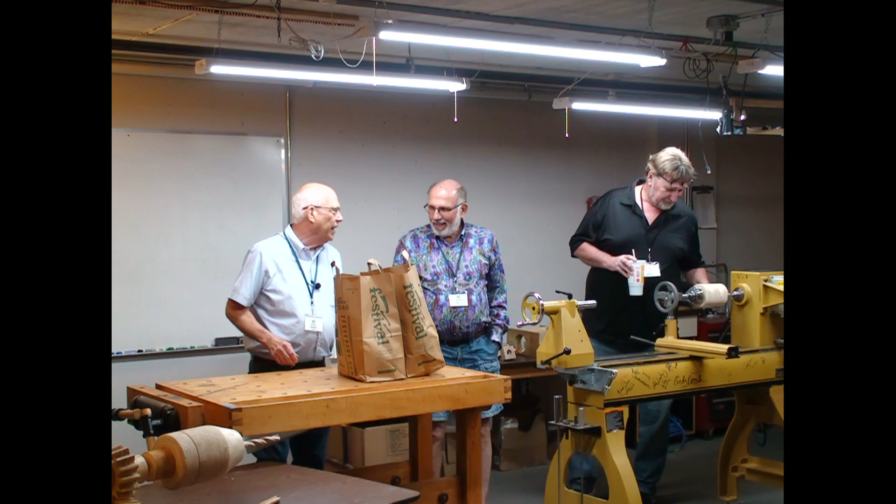There were 5 of us that got together to build this monstrosity over here. Couple months ago. Can't hear ya. Hold on. Hold on. Let's use this one, and then I'll get the other one going. Can you hear me now?

Yeah? Okay. There were 5 of us that got together to build this monstrosity set up here. And the other 2 that aren't here are Joe Ebley and Jay Pillay. They all contributed different pieces. They all gave them back to me, and I put it together. And I had very, very little tweaking to do to make it go together. All right, so everybody did a very good job. And you see it, it's beautiful work on it. It's beautiful work. All right?

Now, Jeff, you want to say a couple words? Couple words. Yeah, I took all the easy pieces. I did the 2 flute drill bit that's on the table because I couldn't even attempt a spiral. I did some screw head. I did the, I don't even know what it's called, the connecting shaft that the knob goes into. All pretty much flat stuff. It was just cut the size, drill some holes, slap it together. So I'll let Jerry do all the hard work. There, I'm done.

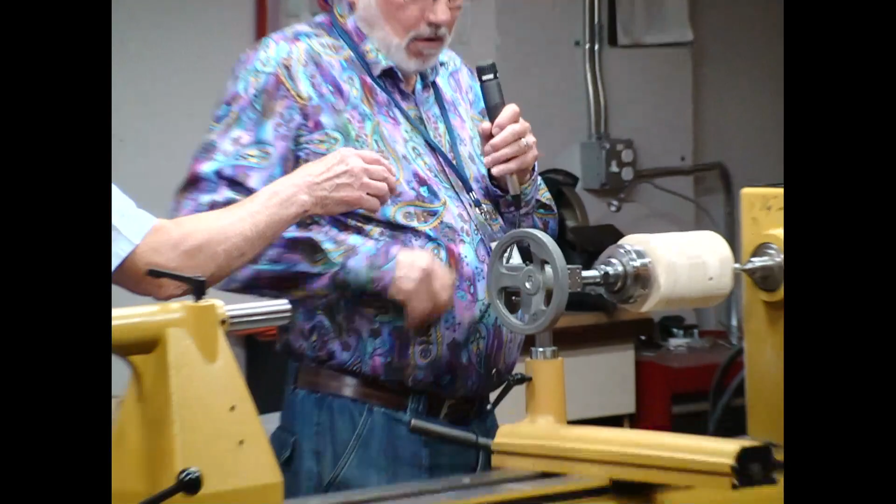The knob on the end of the handle is threaded, so it threads onto the body. And I've got a threading jig here that I can show you how I did it. And of course, part of the trick here is this is the piece that gets the threads cut. And there's a lead screw here that gives you the pitch, and this cutter here actually cuts the threads.

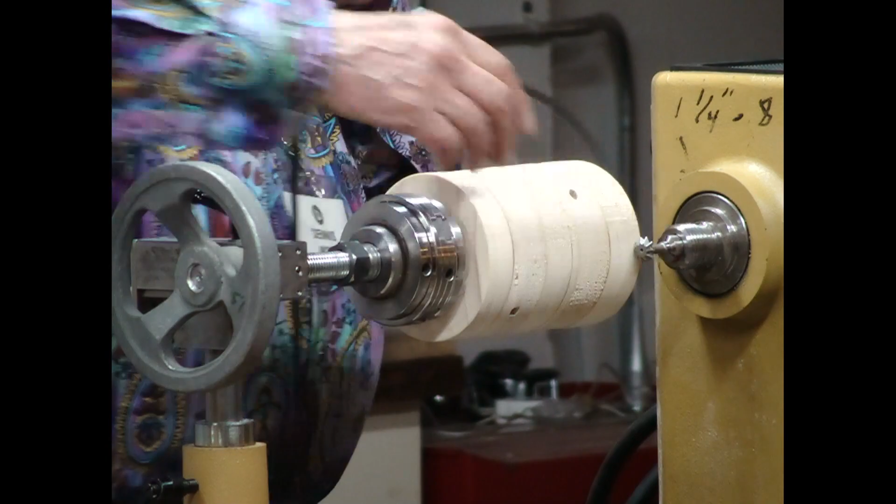The problem is when you look at that piece there, it's 2 feet long, and you've got to hang it off the chuck. So you'd be way back here. So what I ended up doing is making that in 2 pieces, and also the knob on the end. And of course, the knob on the end is segmented, so I glued it together, and nobody knows the difference.

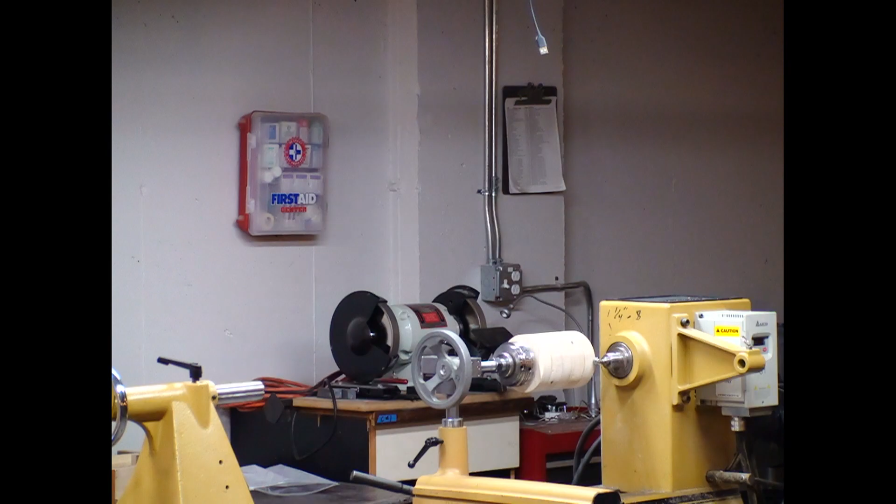But it was just interesting, and carving the drill bit, that wasn't a bad job. I suckered Bruce into joining the carving club down there, and so carving a spiral like that, it's kind of fun. And I won't tell you what happened to the first one I carved. Did that burn well? Yes. Okay.

Thank you, Dennis. The gear on there, that's usually cut on a milling machine. How did you do it? I didn't do the gears, Jerry did. The pieces I did were these two, and then the bit on the end. You know, from one end to the other, nothing in the middle. They couldn't have done that on CNC machines.

What diameter drill is it? What's a 64th less than 3/4? Whatever it is, that's what it is. 47 64ths.

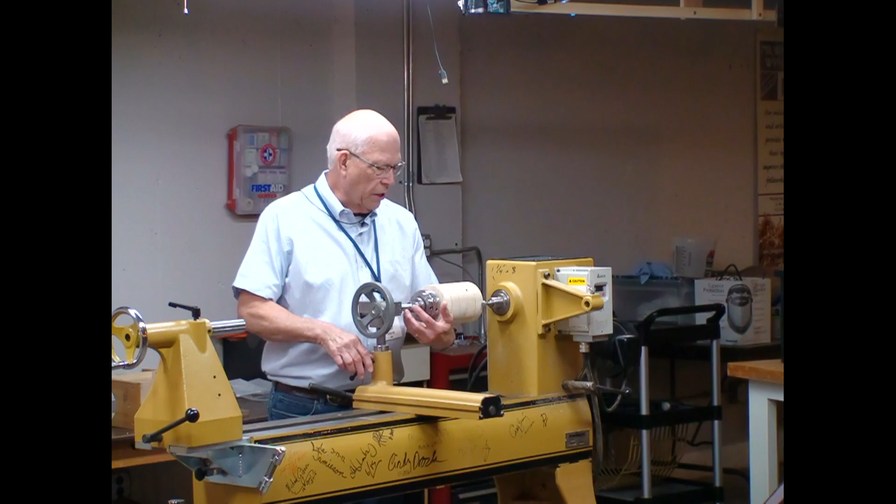Can you hear me now? No, you gotta get it close. I hear you rattling it. Yeah, can you hear me now? A little bit. Better? Is that better? Yeah. That's better. All right, we'll go with that. Okay. I'll take that off, Jerry. I can just lift it up. Yeah, there's another piece there to the cutter. I'll let you get that. So go over here.

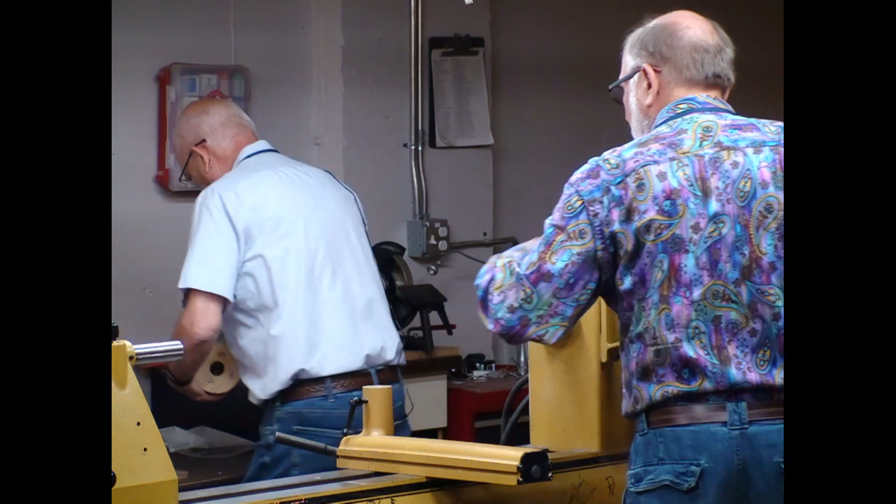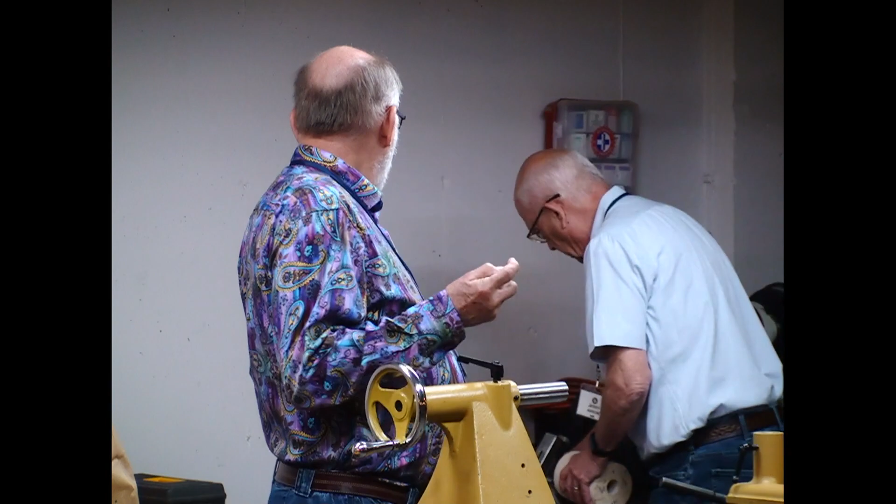How much did that cutter bit cost you? Well, not very much. I was at Arrowmont last fall. They had a bunch of stuff they were selling, and they didn't know what they were selling apparently. Literally, the threading jig with the cutter, which is $60, retail price is $350, and I didn't pay anywhere near that. Some old guy had croaked and just donated it to the school.

If you're ever interested in learning how to turn really well, they have a wonderful turning program down there at Arrowmont. And this fall, Jacques Vesery, who's going to be in Chicago, is teaching a week-long class down there.

Gary, what ratio is that? Six times. Slides? Yeah. Okay. So this is the real one that I use as a model. This was actually owned by my dad. He passed it on to me. I took it all apart, measured all the pieces, made all the drawings, and then made templates for it. And then we'd pass the stuff out and guys put it together.

What I made was the pinion gears, the big gear, and the chuck. And this particular shaft here goes into the chuck. All right? And like I said, it does work. Everything works. We can't pick it up and show you right now because the way it's sitting is kind of bent. But when I had this all done, I actually put the gears on here and spun it by hand so they go around very good.

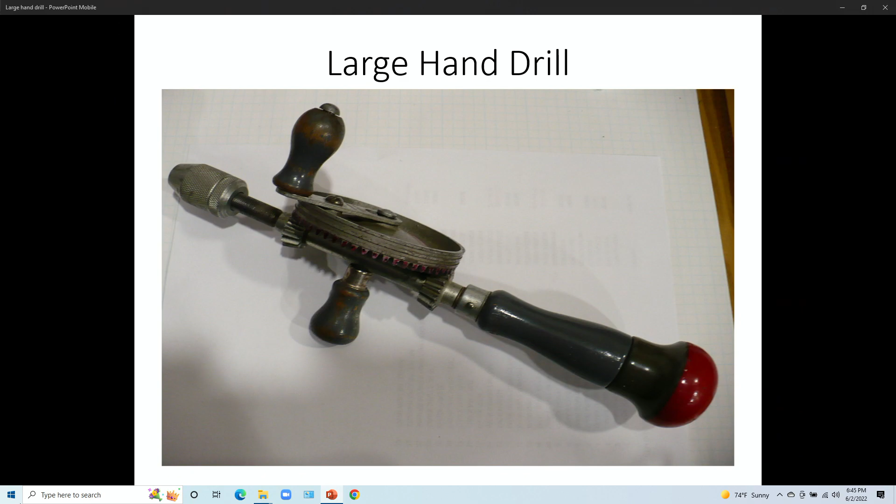Okay, let's go back to the slide, next one. All right, I'm going to try to explain this in three parts. I'm going to talk about the pinion gears first, then the big gear, then the chuck. All right.

These are some of the first pieces I had to think about when doing the pinion gears. First of all, I used segmented rings for the pinion gears, right? And then I cut the body out to look like this, the body of the gear, right? Now I had to figure out how to put the teeth in it. Right? Well, there's 15 teeth in there.

So first thing I did is I had to make an index plate with 15 holes in it to fit on my lathe, okay? This was made on my new CNC machine, all right? So it's very accurate. Okay? Put that on my lathe. I use the small lathe over here, the Powermatic lathe, okay? So you see, when I put stuff on here, it's not going to fit very well, all right?

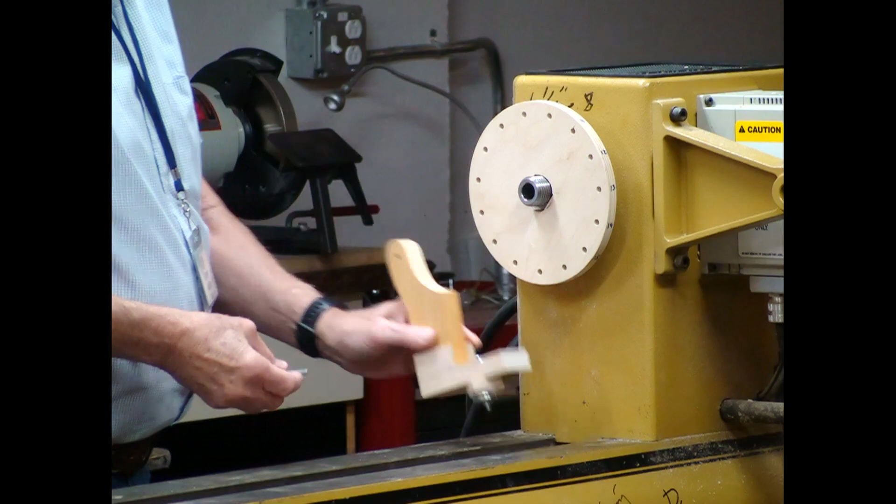So this is the index part that would normally fit up here, so I put my bolt in it. All right? This is just a bolt where I cut the threads off, all right? So it fits into here, so I can index it, all right? All right, so now I figured how to do that. Now I had to figure out how am I going to cut the gear teeth in there. Well, I've got the gear.

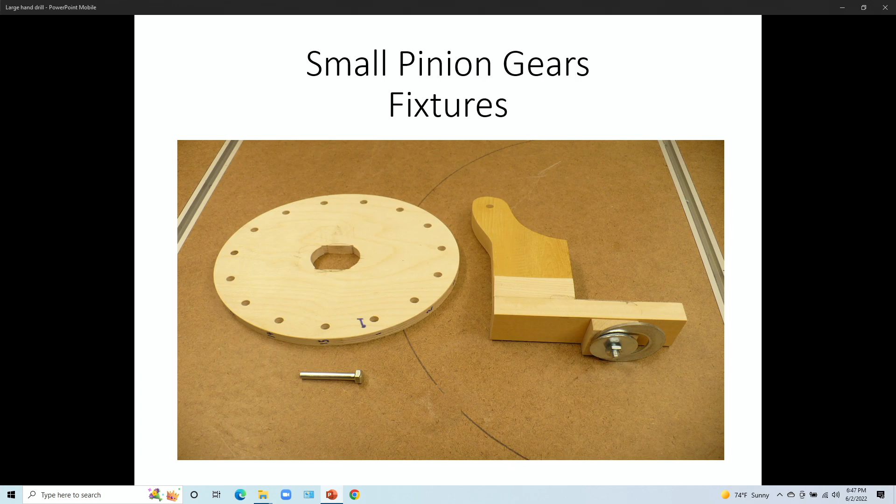Next slide. Okay, you can see how it fits on the lathe like that, very similar to what I've got sitting here. Next. All right. I had to come up with something like this. It fits right in here. Now the gear blank is sitting inside of here. Okay? And it's a bevel gear. So this comes down to here, and I got a hole in here.

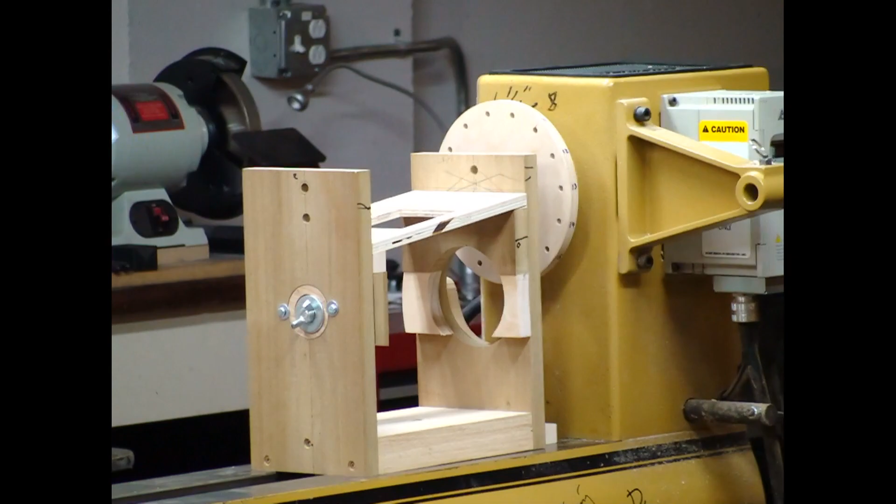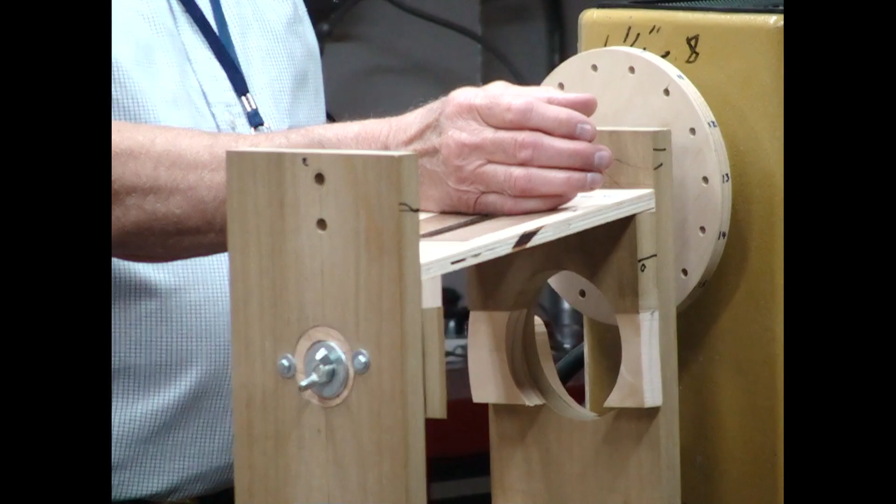This hole was actually cut on my CNC machine also, so that I could cut these on the CNC machine. All right? These are my templates. So I set this on here, down in that counterbore there. I have a router up here. That's a palm router, small one. Okay? I've got this all locked. Nothing's moving. Nothing's turning. Except, and I use a bushing, a bushing to go into this slot here.

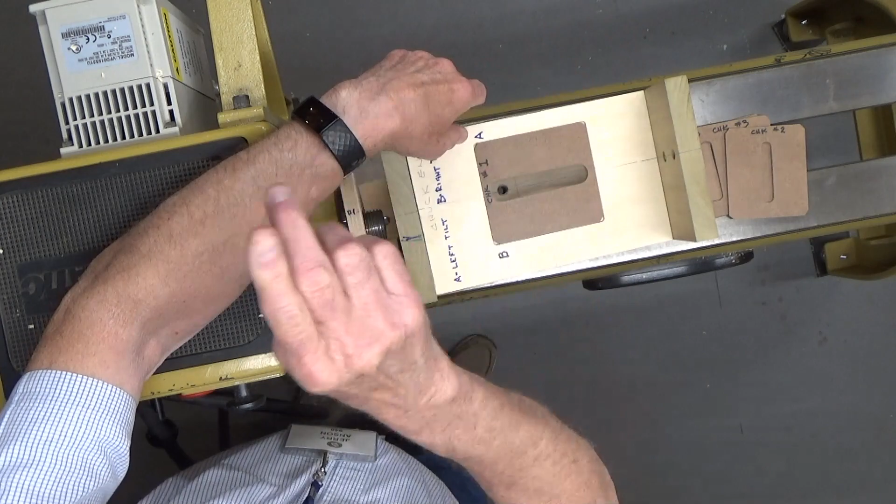All right, and I get set there, and I make a cut down the middle of the tooth. Okay, rotate it, same thing, 15 times. All right, take this one out, put this one in, go a little deeper. Almost to the root, not quite, but almost. Okay. Now I've got the slots made for the gears. How am I going to shape the gear, right? All right, well, I've got another one here.

But it's offset. Put that in there, you loosen this up, you rotate this at the right angle. Run it across there 15 times, right? Take this off, flip it to this side, rotate it to this angle. Cut the other side. Get that one. The other bevel, right, because the gear's got 2 bevels on it. Got that one. Flip it over, on the other side, do that one.

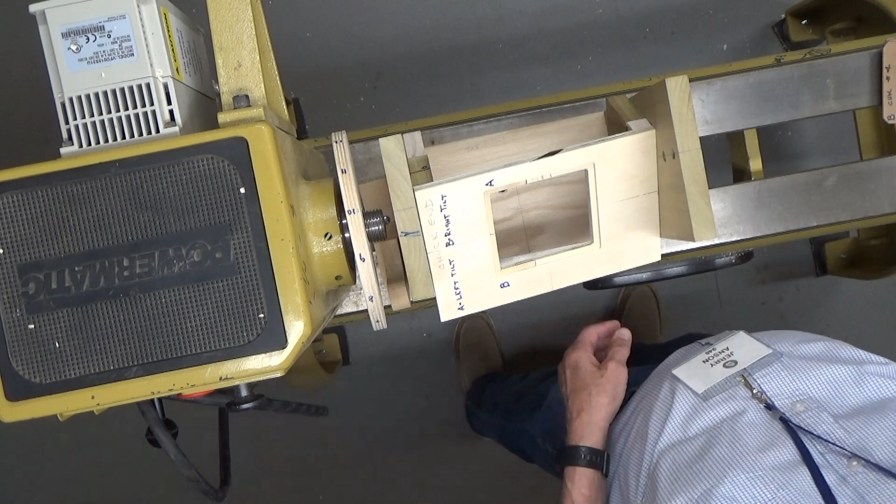There's the teeth, okay? So you only went around 75 times. 75 times, that's all. Wow. Okay, so that's how I made the pinion gear. Small gear. And the first time I tried setting this up, I set this up in holes here. I put a hole in here and a hole in here with a bolt in it with a washer, okay? I was going to pivot it that way.

Didn't work. I wasn't in the center of the gear. I thought I could rotate this around the gear, but it rotated into the gear, and I couldn't get to it then. So I had to figure out how to get it through the center. I got a big hole in here. This cutout here actually fits on the chuck body, and I use that as one of the pivot points. And then I had the bolt through here, like this one. So that gave me my pivot right through the center of the gear. So that's how that worked.

And it came out pretty good. However, I've got all types of drawings and labels on these things. And when I put it in here and started cutting, I looked at the gear after I made about a half a dozen teeth, and I'm cutting the tooth away. I had this on the wrong side. Doesn't it always happen? Yeah. It always happens. Oh, it's always something, right?

So now I... What number gear is this? My number gear, 15. 15? 15. Okay.

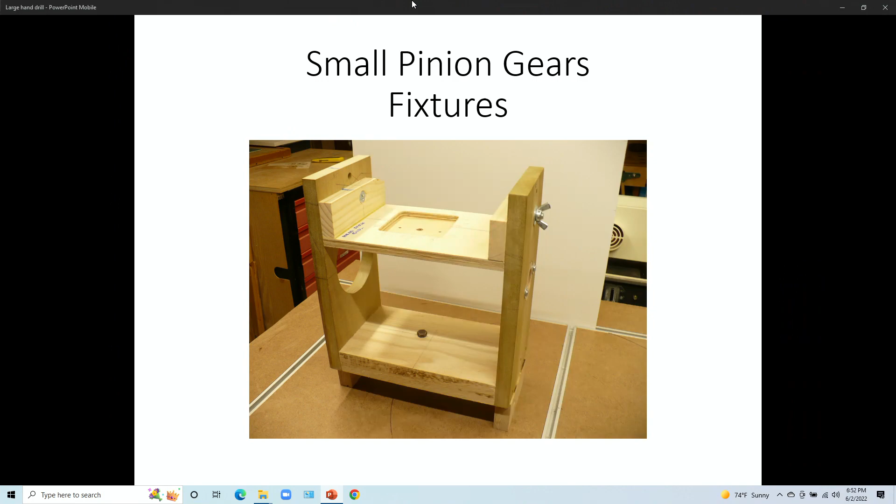All right, so what do we got next? Okay, there we saw that, we saw how that works. See, you can see it in there now, there's the blank sitting inside that box.

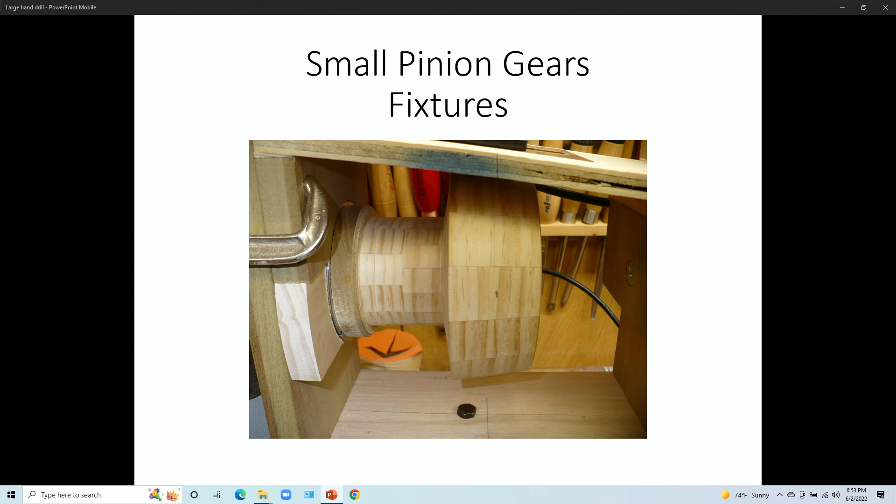Okay, next one. You can see where now I moved the router up there. I kind of stood behind it and just pushed it down. Where the hole slot was a little bit wider than it flew over, it flew back over there. And you can see there's some clamps on it.

I had to put the clamps on it because I only had one bolt holding the whole thing together, this thing in the middle, because it was resting on the chuck body. I didn't want it to move or get out of parallel, so I actually clamped it in the back and clamped it here. Sometimes I had more clamps on it than I had tools.

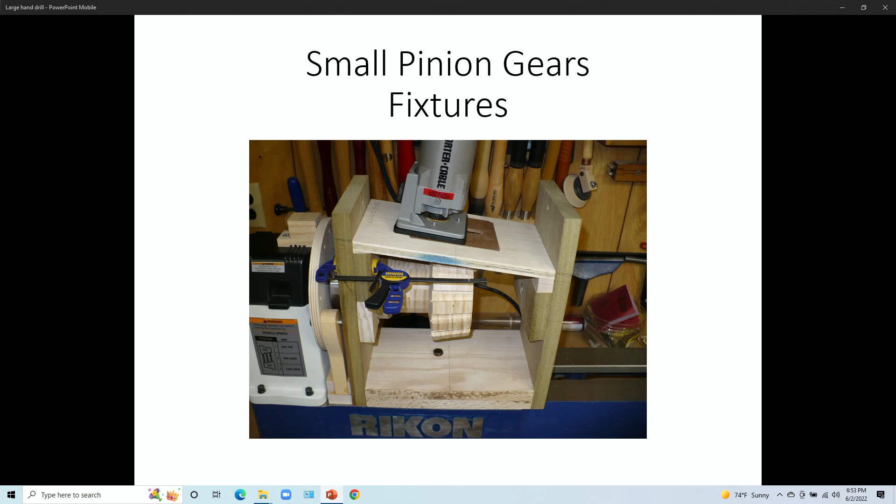All right, next one. Okay, any questions on the pinion here? All right.

All right, let's see what we're going to do. We're going to do the large gear now. Now, where the problem came in on the large gear was my CNC machine is only 12 by 13, and I made that gear on there. That's a 20-inch diameter gear, 5 inches tall, and my machine is 12 by 13 by 3 inches.

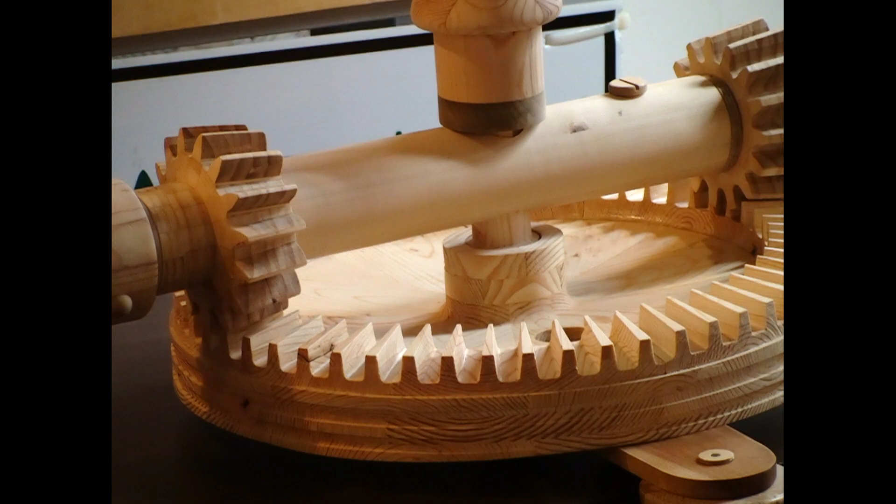What's nice about the gear is that it's got 56 teeth. Divided by 8 is 7, so it's a 7-segment gear tooth here, 45-degree angle, 8 pieces, 8 segments. So it just worked out perfect. This fit on my machine without a problem, not this way, because that's too high.

So what I had to do was I looked at the drawings, and you can see the shape here, it's got this curve in it. I had to figure out where I could slice that, so I had pieces that were stuck together, that stayed together. And I got how I worked on it.

This is actually made up of 5, three-quarter-inch layers of pine. What I did was, let's put that slide back. This was the first piece that went on. That piece is right here, this cut here, and right across here.

And you'll notice that I had to screw it down to the table, there's 3 screws on it. I was using double-sided tape, but for a piece that big, it's going to have a little warp to it, so I screwed it to the table. You'll also see 3 other holes up there, sort of in the middle. Those are random holes, so when I take this and flip it to the back side, I can put dowel rods in there and locate it exactly in the same position.

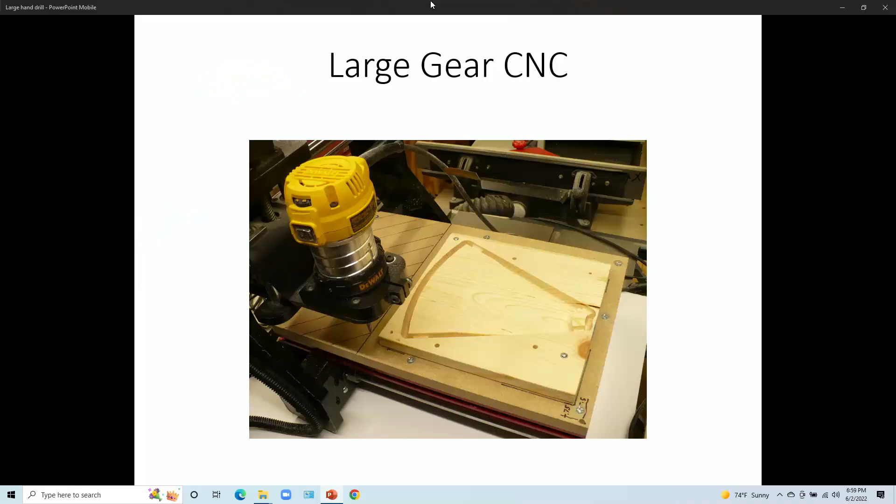So I came up with a different idea. All right, so I'm starting exactly the same way, same piece, same first cut.

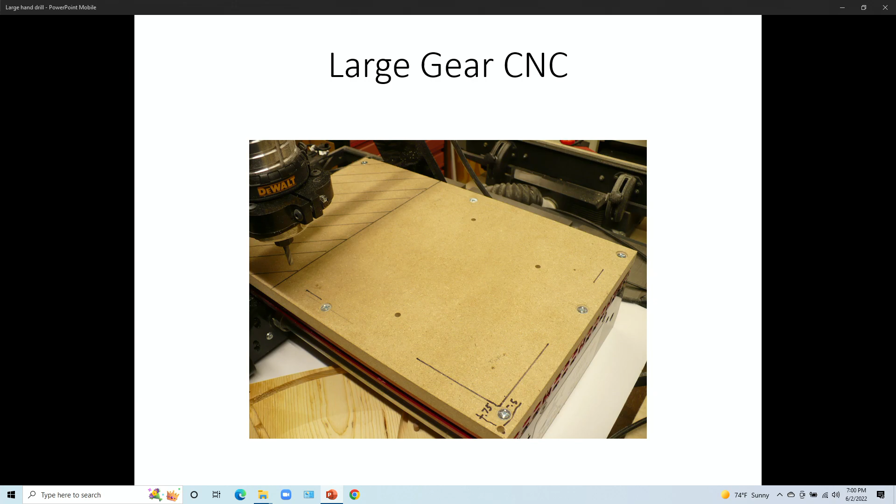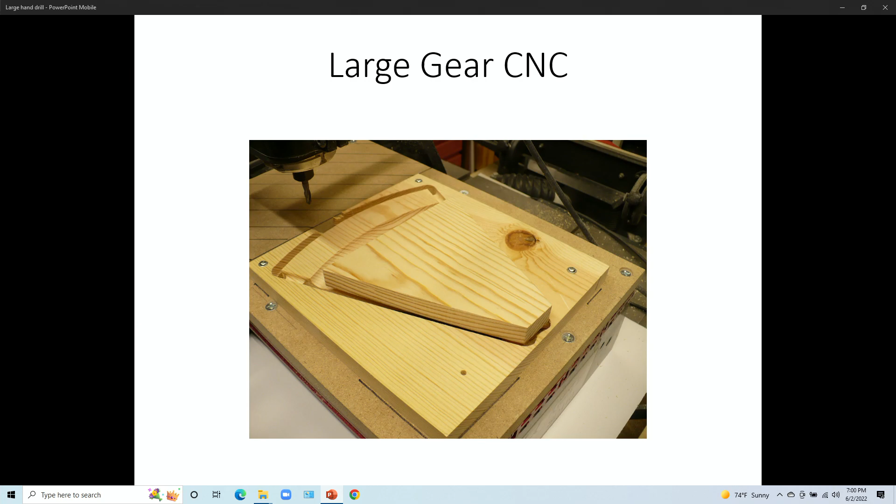Next, there's the second side. That's the rough-out, roughing out the second side. Now I glue this piece on, and rough that piece out. So now what I've got is the center part.

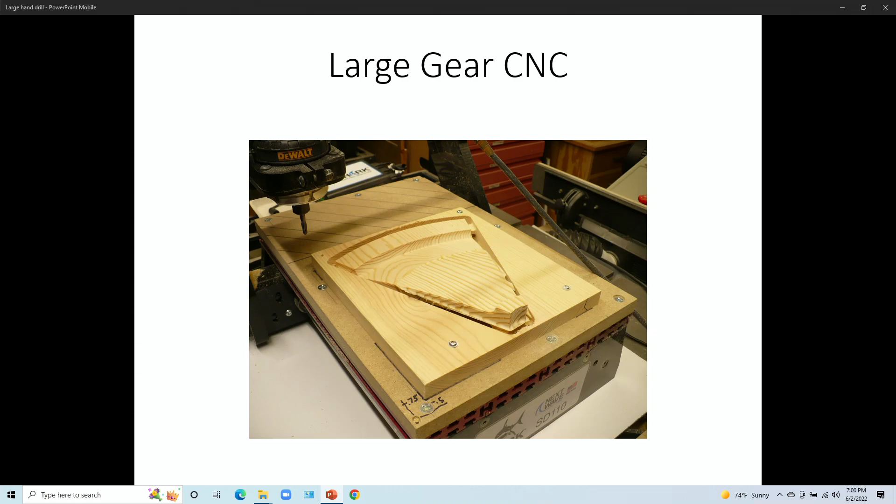There's 2 boards in the middle, those are done. But you're still gluing those together. Yes, still gluing those together.

I apologize, I don't have slides on everything I did, and I think I mentioned this before, when you work on stuff like this you forget about the camera. You're concentrating on what you're doing, and then you say, oh, you know. Yeah, darn.

So what I actually did, after I had those 2 centerpieces done, I took individual pieces of wood in this shape, put the first one down, cut half of the gear, put the other piece on, finish the gear. The piece on top of it is a full piece, because otherwise I'd have to glue little bitty pieces on there to cut those out. So it's a full piece, and I cut it all out.

So I did all 8 gears like this. I had 8 of these sitting off to the side, and I got these pieces here, did the same way, just a piece of wood and cut those on the side. For the hub pieces, instead of having 8 pieces, I only did 4, because when I was cutting some of those they started to break off. So that allowed me to overlap the glue lines, and also give it a little more strength. So then what I had was a bunch of pieces.

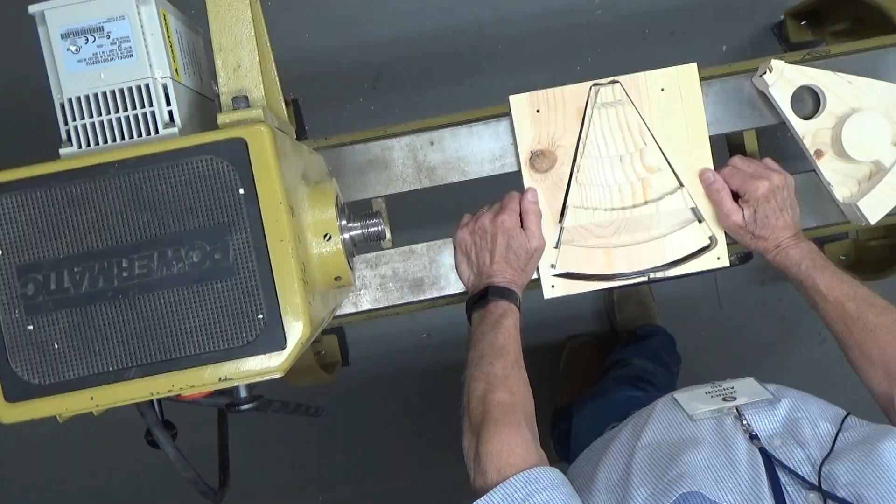One of the things you forget to do sometimes on your CNC machine is you have to reset zero each time you change the height or change a bit. I never forget to reset zero X and Y, but I forget the Z. I don't know how many times I did that. I was able to catch it most times, but on this one I didn't.

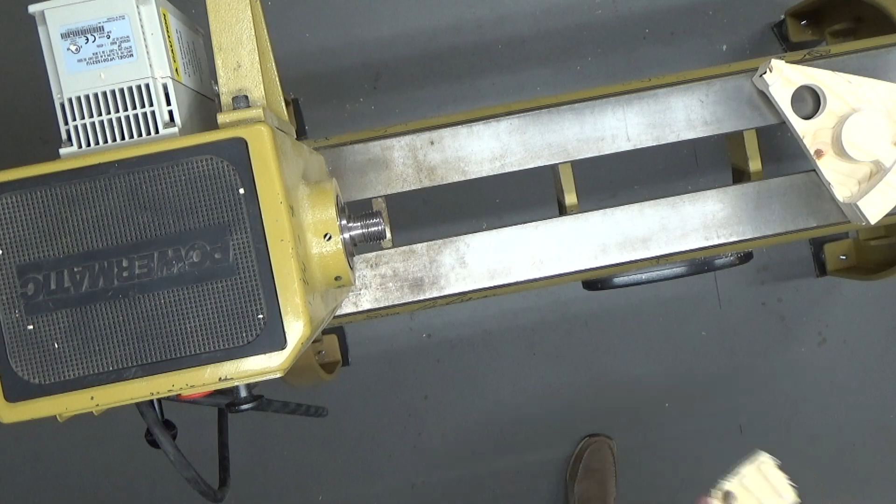It's cutting way too deep here. I was trying to watch it, but sometimes you just don't see it, so that was a bad piece. Again, I forgot to set the zero, and it goes cutting right across it. I was moving about 70 inches a minute, so you don't have much time to react. By the time you say 'oh,' it's already gone that far.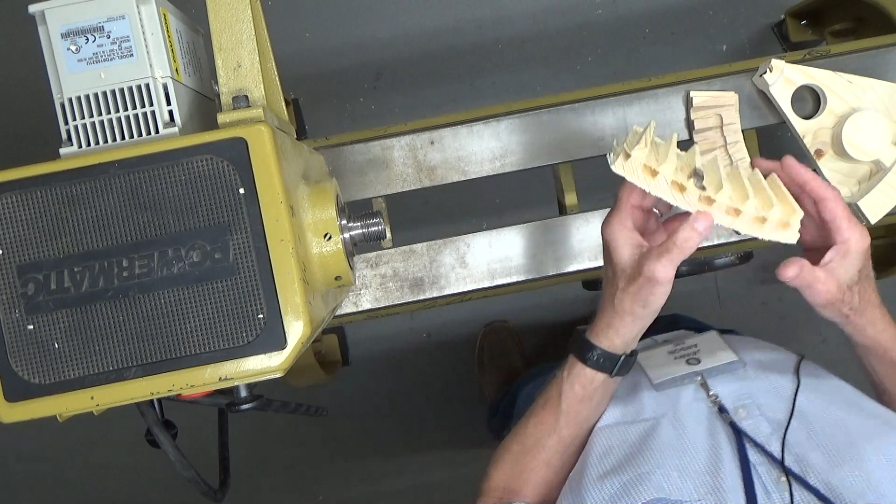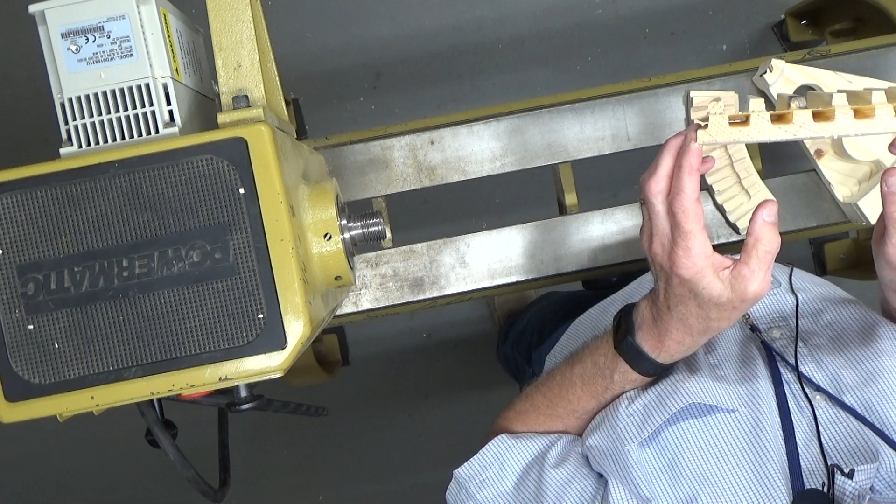Here's another one. I'm not quite sure what happened here. I think I jostled and moved my XY zero a little bit, because they don't line up at all. It's off about a quarter inch this way and about a sixteenth this way. So I jostled it and messed it up, but you can see where the two layers are at.

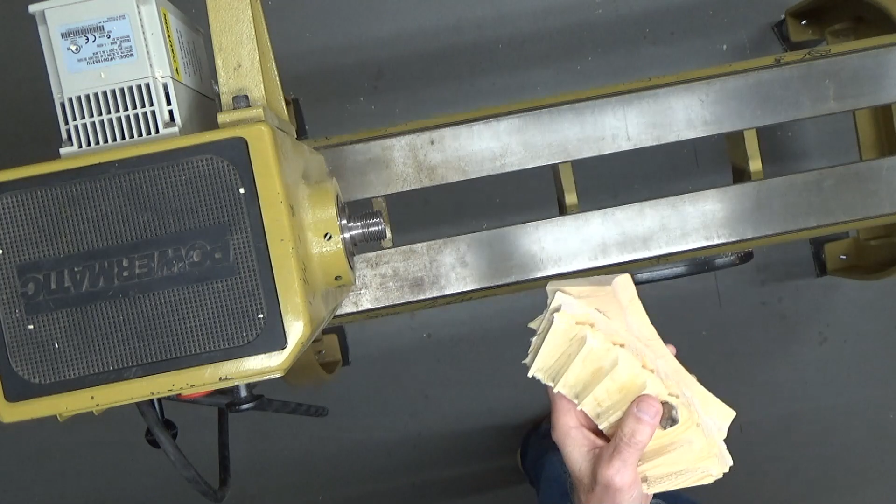Now this one - I have my CNC machine in, I have three rooms in my basement. One is an office with my computers and resource material. One is a big shop where I've got tools like this. Then I have one that's about half the size, same tools, but only this big. I have a table saw in there not any bigger than this, and a drill press about this tall. That's for the little stuff I do, and that's where I have the CNC machine.

But it got dust all over the place. I've got more nooks and crannies in that little room, and I got these chips all over. So I moved it, and it's actually sitting on my table saw right now in this shot. Can you go back? There you go - you can see the chips around there, and that wasn't a lot of cutting.

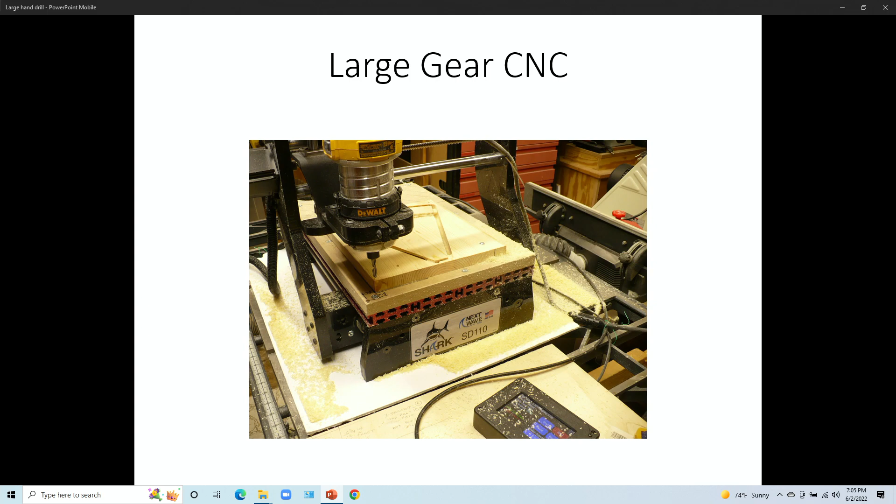So what I did was I built this box to go over it. I just had a foam board and put a little clear plastic hole in there so I could see what was going on, and my vacuum hose, which didn't do anything but hang there. Then when I was through cutting, I took the box off and used the vacuum hose and sucked it up right around it. So it works out real great.

How long did it take to cut a segment? I'd say on average probably 20 minutes, because I was going about an eighth of an inch deep at 7 inches a minute, and that's usually a rough and a finish pass, with the finish going a little faster.

Would you say your prep time was probably 7 to 10 times as long as the actual cutting time, with everything involved? It was about the same. In the planning? Oh, well, the planning took months - it lengthened over time, overnight, 8 hours a day. That was just a twinkle of an idea, and I had to figure out what that meant.

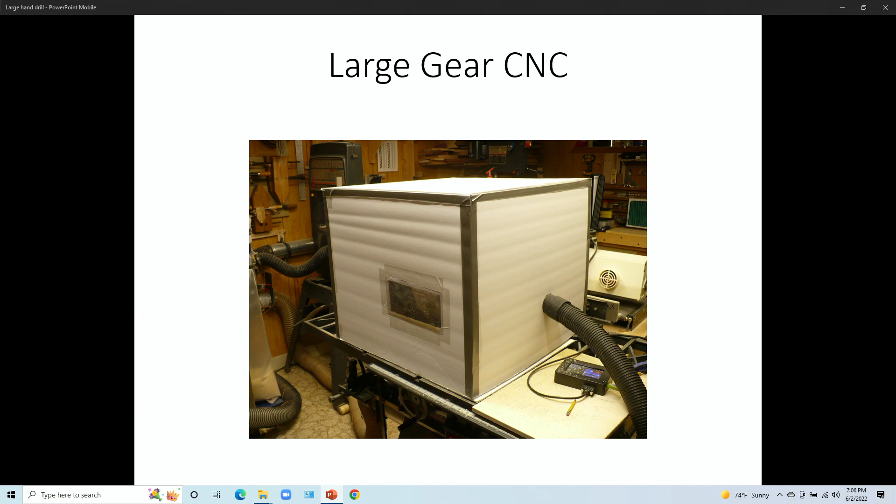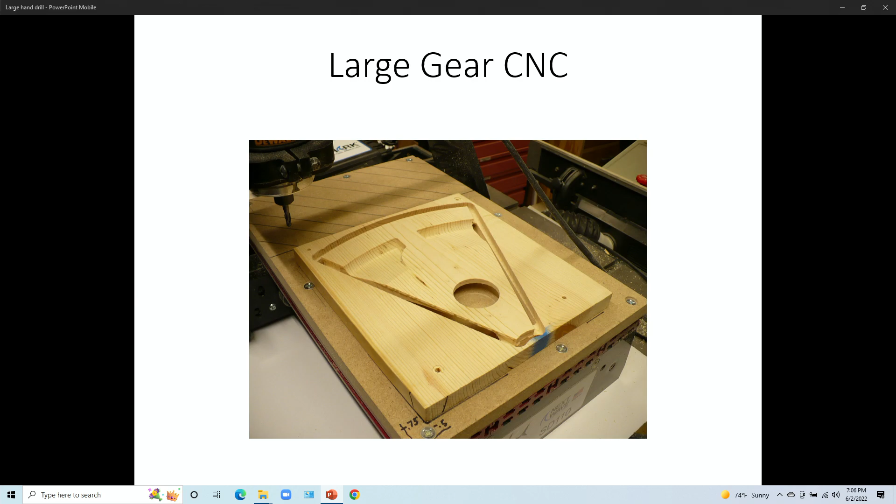Next slide please. Okay, so this is machining, the one with the boss on it again. You can see I cut the hole in it with the CNC machine, and the boss there. You can see the tabs - I actually put tabs on it now. There's one down in the corner here, and another one up there. That's what holds the piece inside so you can turn it on both sides without it falling out.

I did take 4 of the gear segments by themselves, put it on the bench, to see if these pinion gears would roll on it. I hate to go through all this stuff, but they go. I just pushed it right around. Okay, next. All right, now I'm gluing it together.

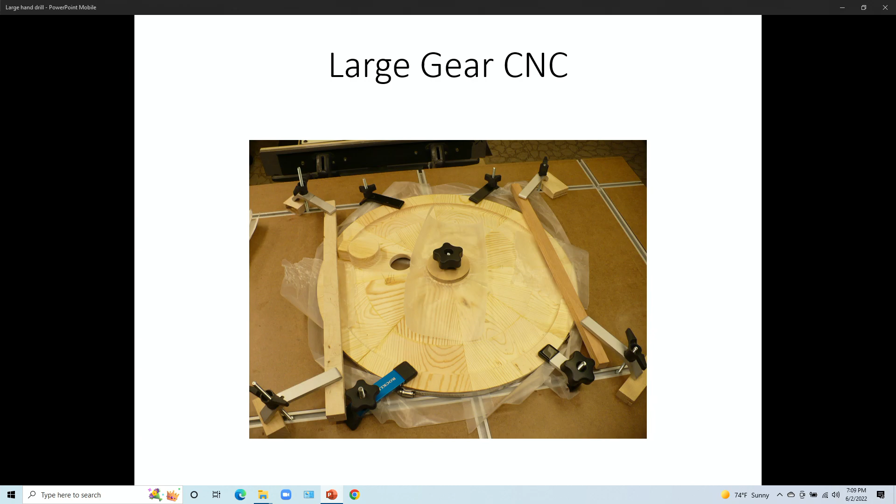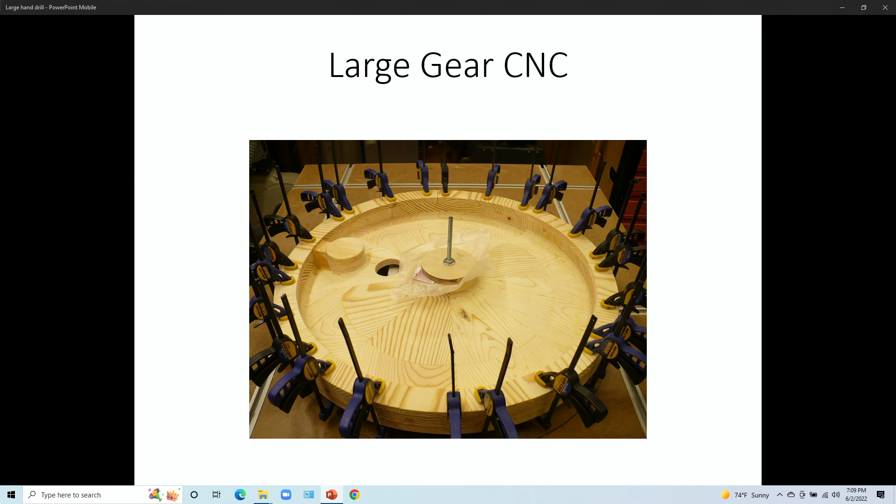All right. Now I'm putting some more of these rings on up there. My wife said, don't you have enough clamps? I said, you never have enough clamps. Perfect example right there. Next one.

Okay, so what I've got done is all the segments are together, this hub is on, and these pieces here are on. Okay? Now, what I want to do is, because this is all end grain, right? So it's a little rough, okay? And there's a little bit of nicks and notches and stuff like that in it for different reasons.

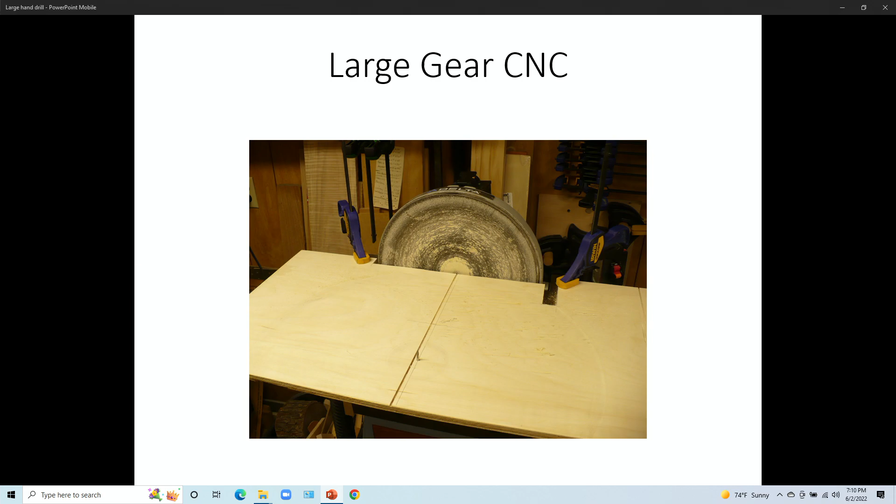So I went to my 12-inch disc sander, I put a plate on it there, I put a nail in it right in the middle here, right down there, for a center point. Next slide. I set the gear on there like that. I had another piece of wood down inside the board there with the hole in it. Turned this on and then I just turned it, just to smooth this out. Okay, next one.

Okay, now, these screws here. That's what I'm getting set up to do here, putting those screws in. I'm a little anal. When I looked at the real one, they were on there, so I figured we gotta put them on there, right? So I got the same base I had before. Now I'm on my router table, and I'm starting to set it up to put those grooves in. And I've got a slot cutter to do it. All right, next slide. There we go. You can see that there.

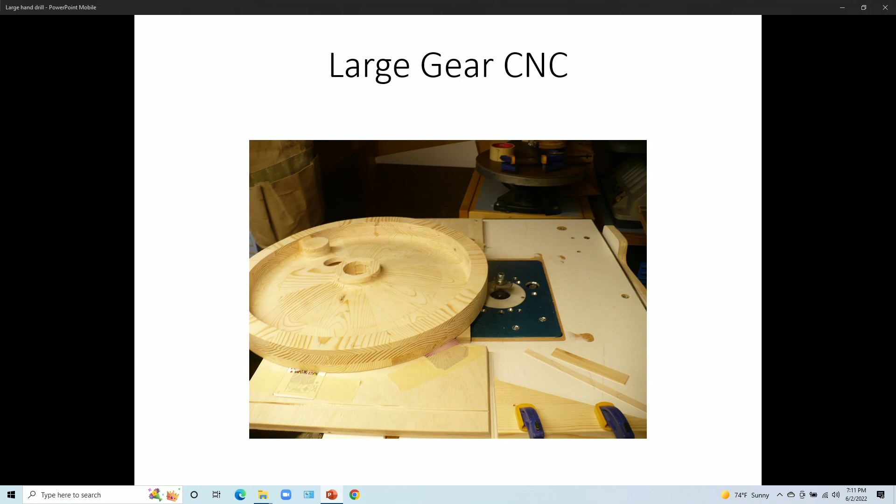Now to control the depth, on the top corner of my plate there, where I've got the gear on, I just got a screw in there so I can pivot this thing in and out. These shims here are 1/32 and 1/16. I was going to go a 32nd each time I went out. So as I moved this plate into this block here, where that little slot is, I put one of the shims in there, and that gave me that depth of cut. So that's how I did that. I rotated it by hand and made those cuts on there. Alright, next one.

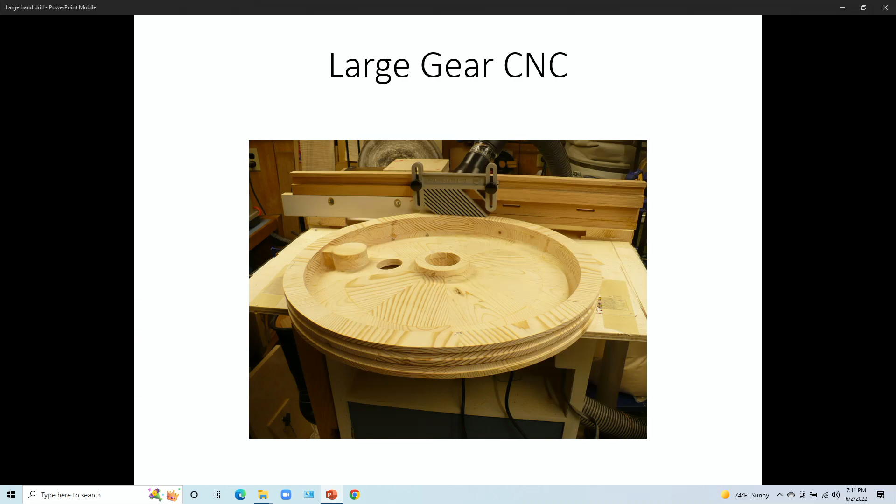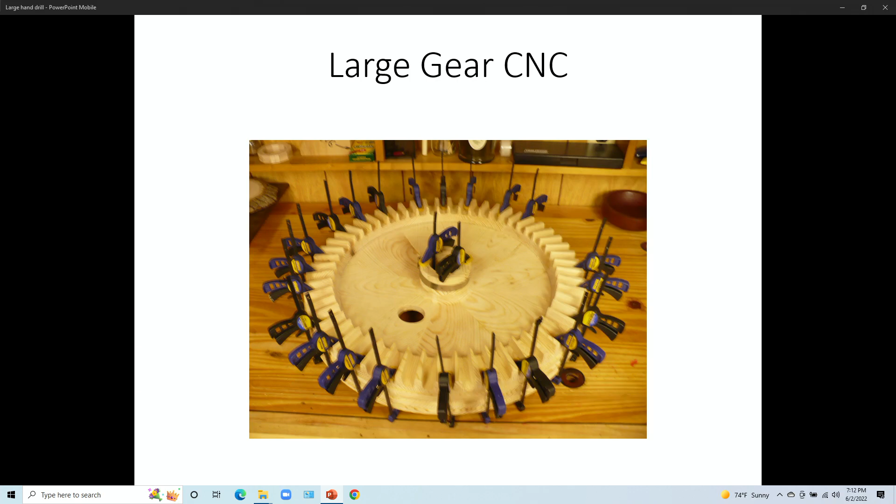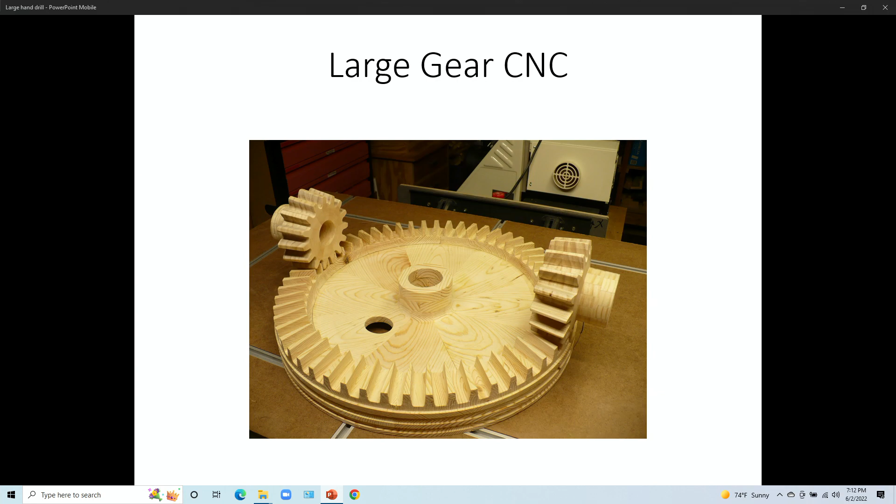Now I'm gluing the gears on the top. Same way, used all my clamps, almost. There's one missing in the back. Oh, here's where I put the gears on it, just to roll them and see how it works. All right, that's the large gear. Any questions on that one? Everybody can do one then?

Now, you made a comment earlier about gluing, putting a piece of wood to glue it with paper. Yes, and then it separates. You just put a knife blade in there, and then it pulls apart. It just splits the newspaper right in half. Sometimes you can do it with grocery bags. That's how they used to hold parts. They put a piece of wood on here and glue the other piece to it with paper between it. And then that's how they knocked it off.

Oh, that's when you make symmetrical stuff, turn. Huh? Turn symmetrical stuff that way. Yes. You got a hollow hole in there and you can, yep. What kind of glue do you use? Titebond Original, Titebond Original. Okay, all right.

There's those parts right now, is the chuck body. This part here's the tall one. These are two pieces, they're just one sitting on top of the other. And then this is the other piece, the cap, chuck cap. Okay, that's all segmented rings glued together. Next one. Oh, and you can go back. Get down about here, that's your chuck jaw.

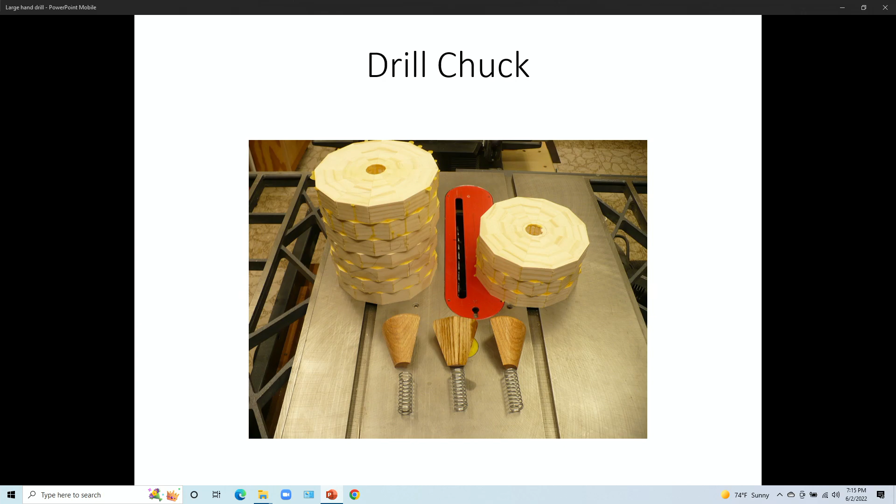So I went to Ace, and I bought 3 springs. And those springs were perfect in length and diameter and everything, except they were too strong. I couldn't turn the chuck on this thread to get it to work because it was pushing too hard against the threads. So I had to go back, and I got 3 springs just like it, but stepped down in diameter of wire. And it works fine now, except for the humidity. Okay. Next slide.

I had to drill counterbores in both sides of the jaws where the springs go, because you got a jaw here, and the springs between them. So that's just a little L bracket on there, the clamp holding the jaw against it. It's squared up on the top left side there with another block to keep it level. And then I got a wedge underneath it to support it when I put a counterbore in. And that's how I did the counterbore stuff.

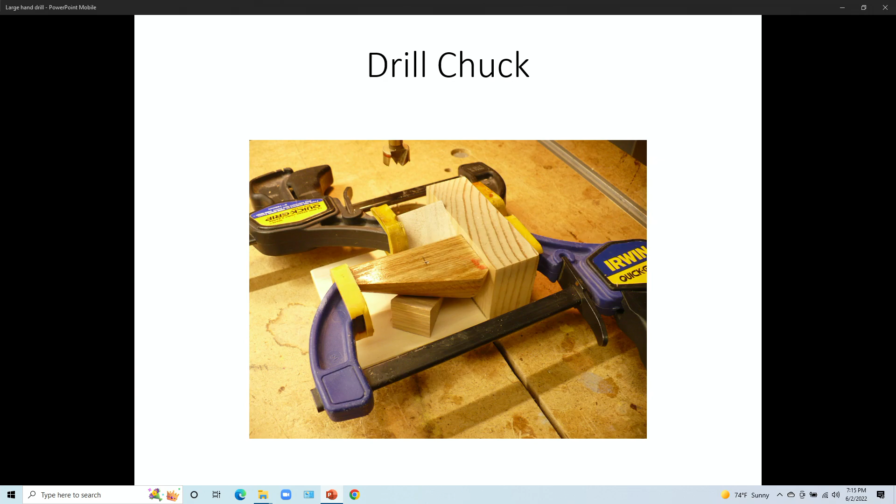Okay. Next one. This is a pointer. It's a pointer. All right. I thought somebody was going to beat me with it when he walked up. Thank you. All right.

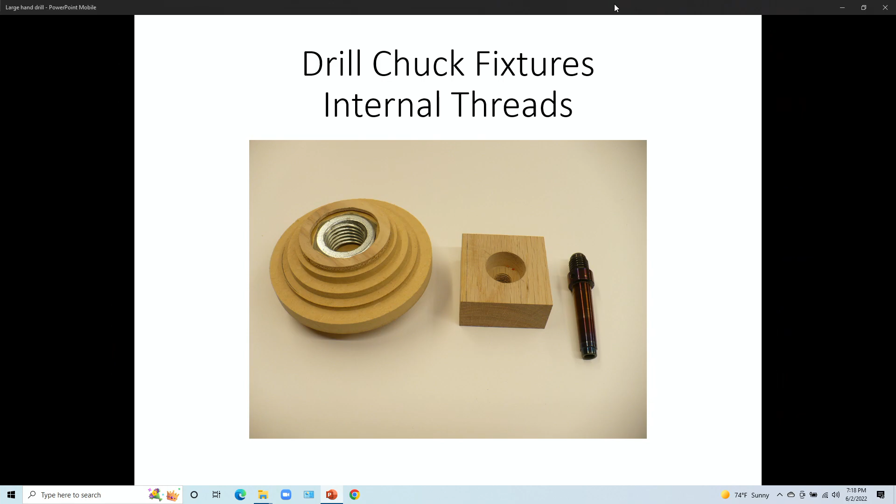Now, let's say this is the internal thread. Let me see what I'm doing first here. I don't know if I'm doing internal or external. Next slide. Internal. Okay. You can go back one. All right. We're going to do internal threads.

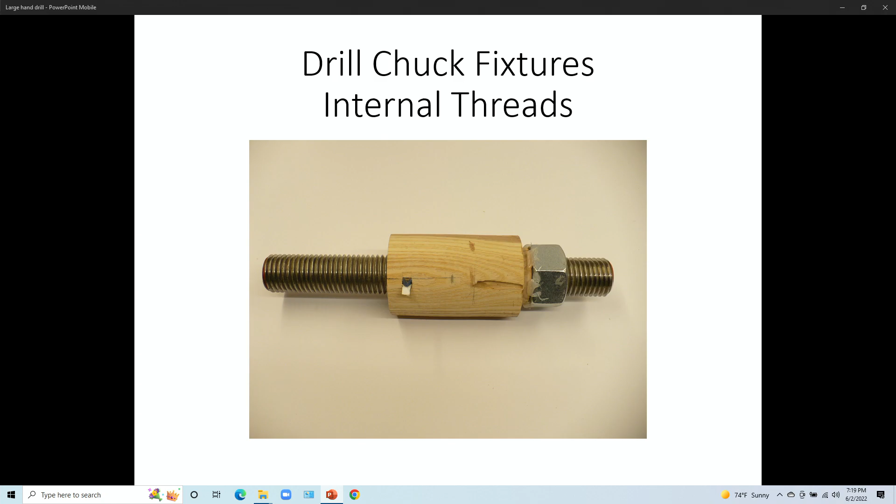Okay, so we got this sitting on here. I thread this into here. This in here is forced into here. This is almost the diameter of the inside hole of the cap, the inside thread of the cap. This here is a 60-degree metal lathe bit for turning threads.

I got a square hole in there. I got it as tight as I can, as deep as I can, so I didn't get any movement in it. I didn't want it to twist on me. I didn't want it to wobble on me. I got it in there, and I couldn't get it out, because I need to change the depth of the thread as I'm cutting it. First one I tried, I put pliers on it and tried to pull it up, and I chipped the carbide, but I got it out.

See this little piece of paper here? That's a playing card that I got from Potawatomi. I glued that to the back of it, so it gets out of the hole. Comes out, goes back in again. To adjust the height of it: Potawatomi playing cards, cut into quarter-inch squares, 10 thousandths thick card. Drop one down in the hole, bingo. Drop another one into the hole, bingo. That's how I changed it up.

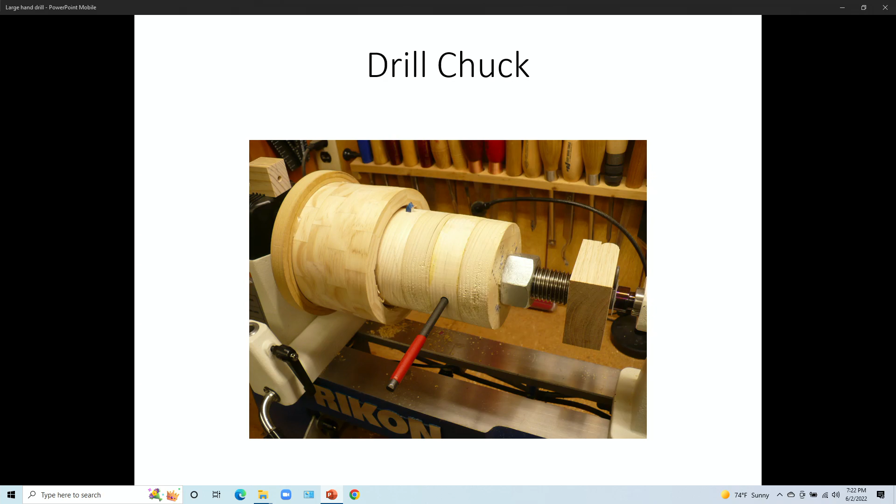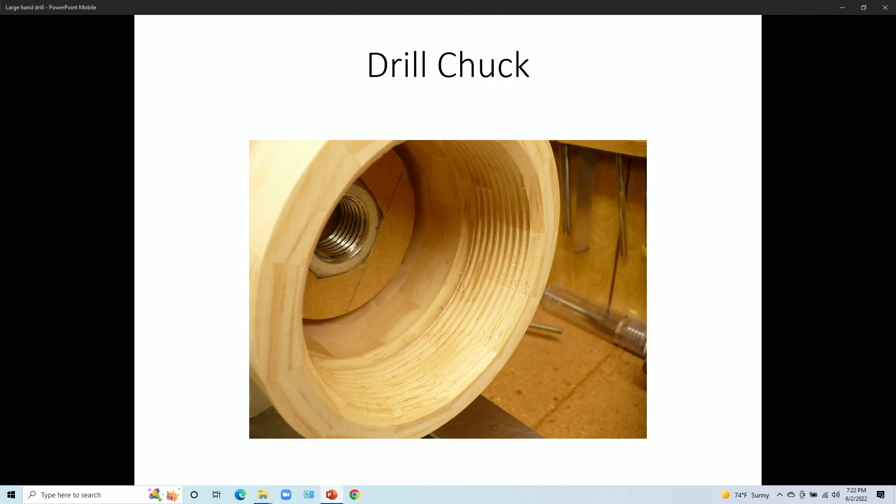Let's see where we are up here. That's what I just showed you. There's the big one. That's how I'm cutting it. It just cuts it real nice. Next one, there's the threads. I cleaned them up with a brush. Then I used that Minwax wood hardener on it, because I didn't want to apply a heavy finish. That just soaks right in, but it hardens them. Okie dokie. Next.

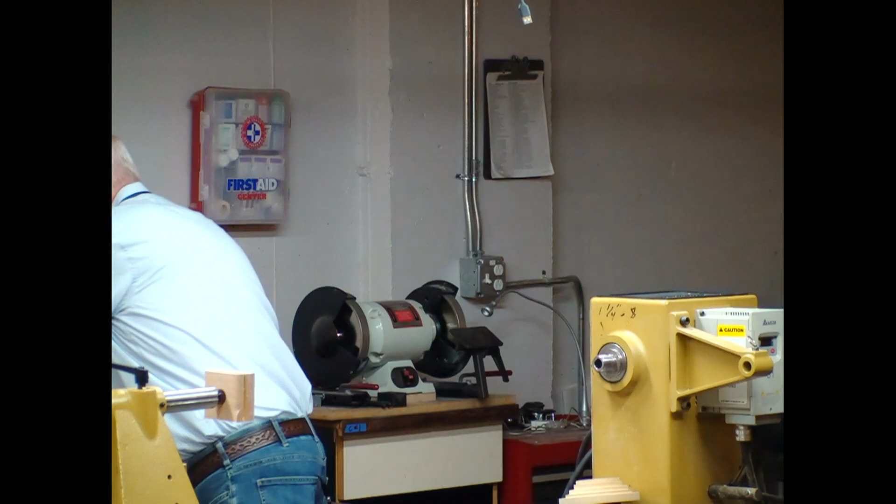External. We're going to take this again, put this on here, because that's what's holding everything. Come back with my little box here. I'm going to use this guy again. I make a new top. This is made the same way, same CNC machine. It goes in here like this. It locks in with the same bolts. Now I put my router up here with the 60-degree bit in it.

Still got it attached to one of these. It's still in here. It's all built inside here, all fits together. Turn the router on and start turning this again. And there's all your external threads. It worked out real great.

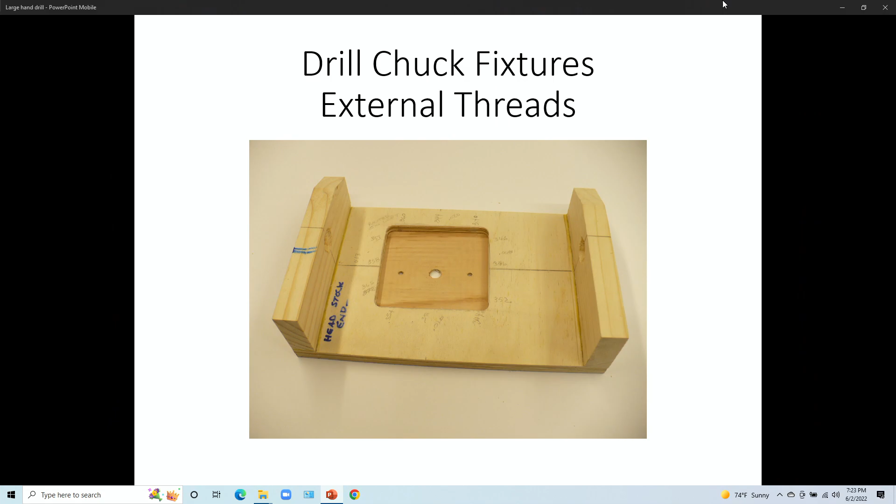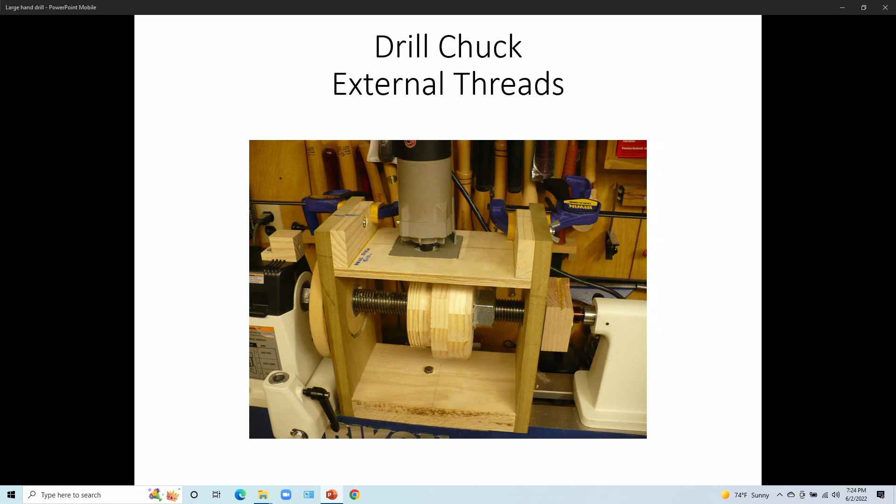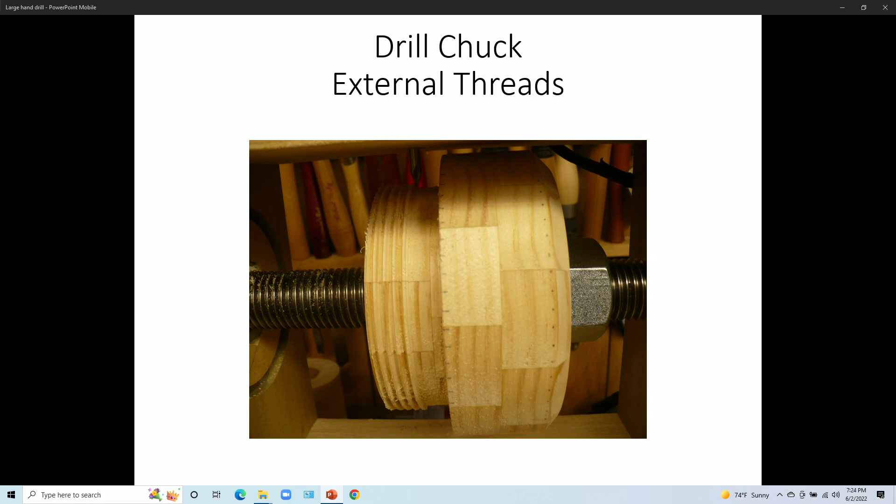Next. There's the box, there's it sitting on there. That's the cap; I'm doing the external threads on this cap here. And you see the rod through it? So I just kept turning that. Nothing was moving, the cutting bit didn't move. That's why I could do this and cut the threads. Next, there's the external threads here. See how long that was?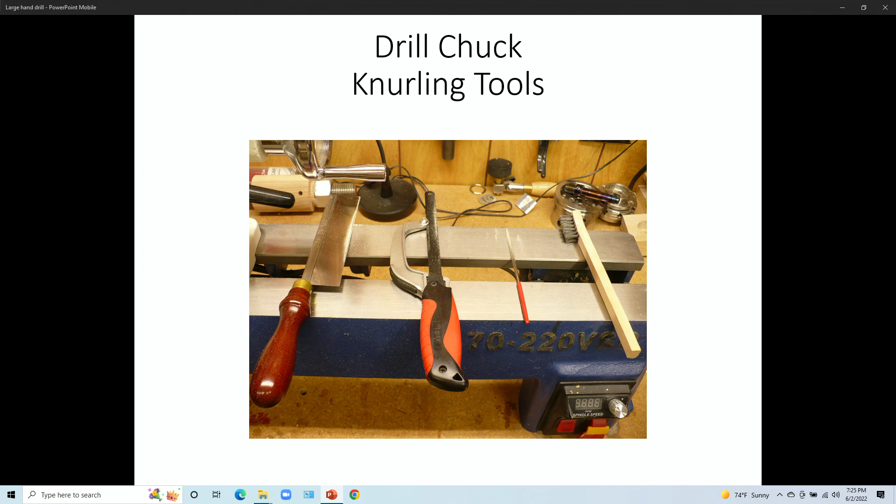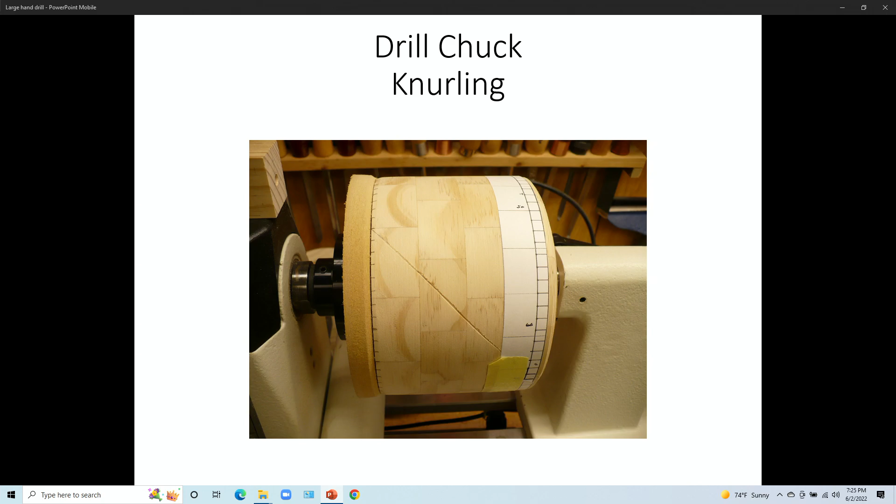All right, I took a piece of paper, wrapped it around the diameter, marked it, measured it, went to my computer. How many divided segments I wanted to divide it up into, like say a quarter of an inch or something, came out close, okay? Cut it out of the paper. That's my measuring tool now. So I wrapped it around here and put little tick marks on each of them. And on the back side, at a 45-degree angle, little tick marks. Okay. All right, next.

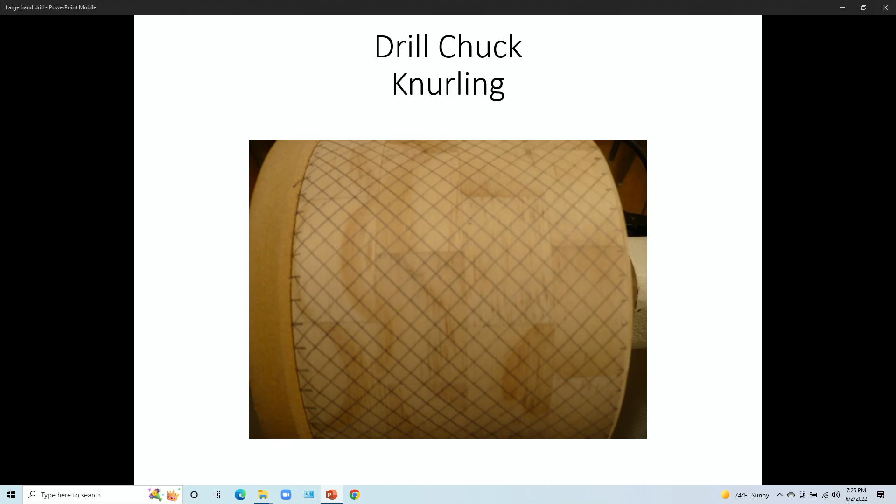Drew lines both directions with the pencil. I think it was like 90 lines each direction. All right, now I got my lines on there, right? Now I took the Japanese back cut saw, right? I did that because it's easier to control as you turn with this and pull the saw than it is to try to push, right? Okay, so I did that. All I did was just, not too deep, just a scoring mark all the way around. Right? Don't ask me how long it took either.

This was days, because I bet that was three nights. I could only do like 2 at a time, I mean, like maybe 5 or 6 at a time. I had to stop. All right. Go back.

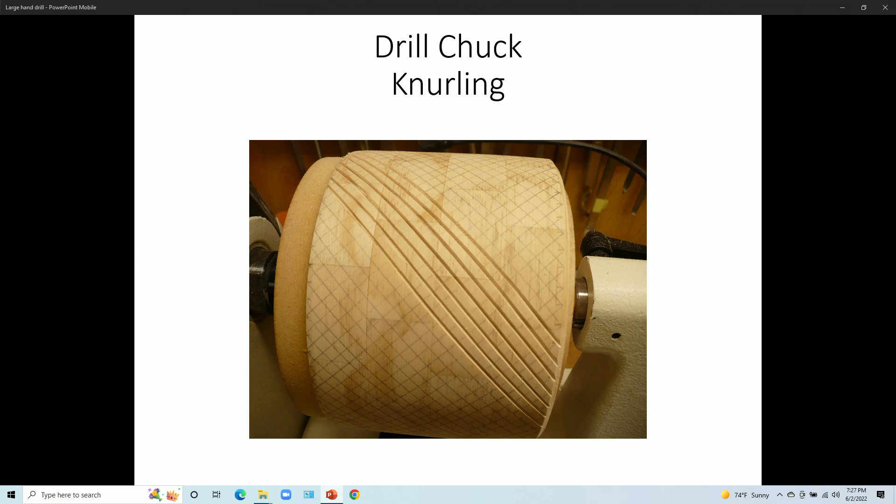All right. Now that I've got that scored, right? Then I took the hacksaw, which is a little thicker, and I used the hacksaw and made the line a little deeper, a little thicker. I took the 60-degree file and went through it to clean it up and put a little bevel in. Every one of those lines. And then the brush was just to clean up any feathers. So it took a long time, but it worked. Right? It worked. Patience. Next.

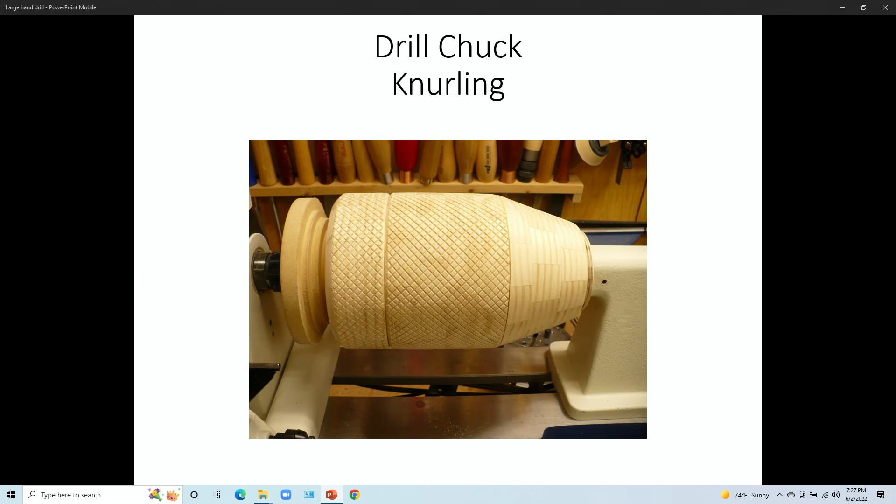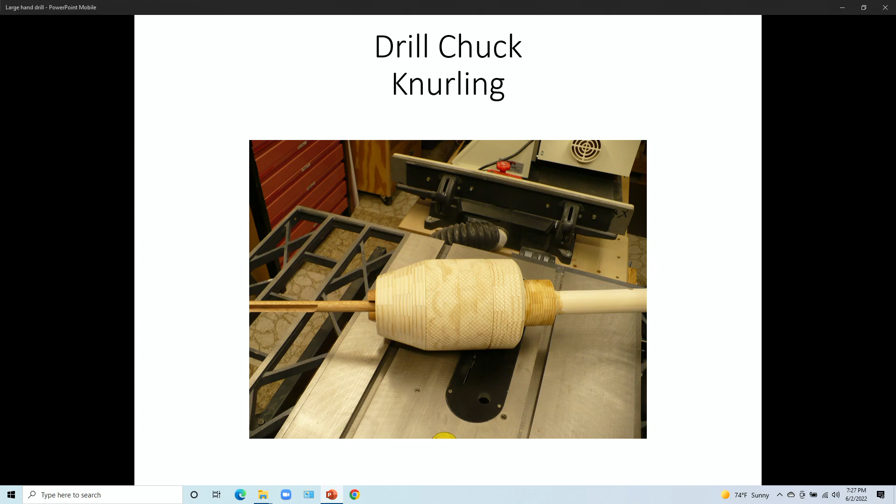Okay, now I'm gluing the cone onto the body. I put it on the lathe so I get it all lined up and centered. Okay, next. And there we go. There's the chuck with the bit in it, with the shaft in it, to make sure everything fit and worked. Next. That's it.

It's incredible. And if you come up here and look inside, you can see the springs in here. We tried turning it, not sure that it does work, but I think it's going to be too tight with this humidity down here. We may have to go in and cut the tops of those teeth off a little bit with some sandpaper, loosen them up a bit. All right. Any questions?

Absolutely incredible. What's the next one? What's the next tool? Oh, no. My wife says that is enough. Because I ignored her for like months working on this. Well, she got back at me. Her list got longer and longer.

What is the ratio from how big you made it? 6 times. Yep. I drew everything actual size, and then I just used the computer to blow it up. Jerry, out of all that you ended up doing, what did you find to be the hardest part to work with, or hardest part to figure out? I'd say the threads. Initially, the threads.

I knew I could do the gear teeth, these here, on my CNC machine without a problem, okay? This was my first attempt of doing a 3D drawing and moving it into the CNC. Everything before that had been flat work. So I had a little challenge there. I kept trying to figure out how to do these on my CNC machine. I knew if I could hang them off the front end, I could cut it. But I couldn't go past the front that far to do it. So I was saying, well, could I do them in halves? But I couldn't do it in half because I can't turn the cutting head.